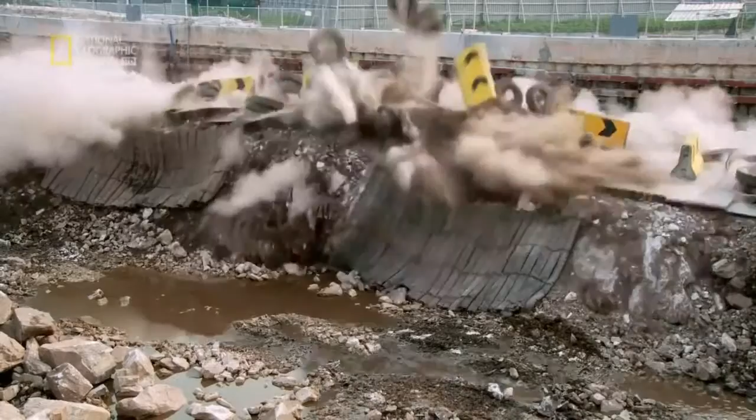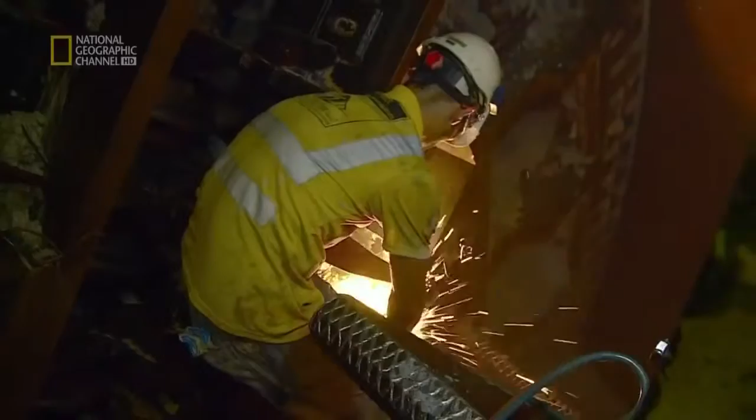Now there's an ambitious solution: a new transit system that will crisscross not only the city, but the entire region of Greater Kuala Lumpur. Huge machines will bore into Kuala Lumpur's treacherous bedrock to carve out almost 10 kilometers of tunnel. Every day of construction, the engineers confront the perils of mechanical failure, fire, and collapse. Get it wrong and billions of dollars of investment could go to waste, and the streets of Kuala Lumpur and its pent-up economy will stay trapped in gridlock.

Kuala Lumpur is one of Asia's most vibrant cities. It's looking to compete with the region's Asian tiger economies. Its magnificent skyline testifies to its soaring ambition. But at street level, it's a different story. The city is blighted by severe congestion that threatens its future growth.

Over 7 million people live and work in the Kuala Lumpur region, the Klang Valley. Every day, they head into town in 4 million cars. As an alternative, a light rail transit system was built. But over time, it has been overwhelmed, and connections are inadequate.

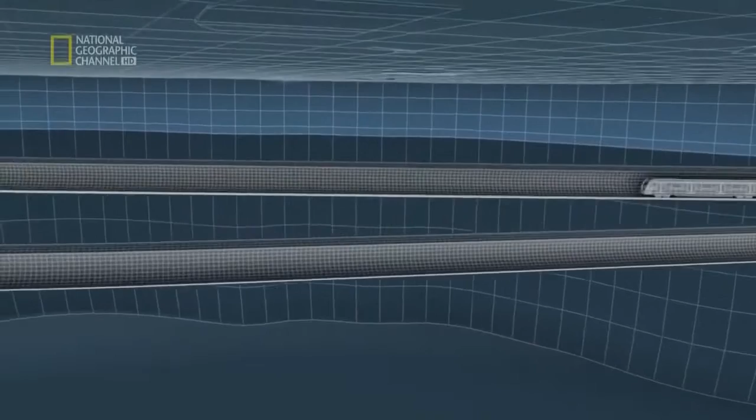Now there's a solution, a new mass rapid transit system that will reduce the pressure on traffic and unite far-flung parts of the city. For any modern metropolis to be vibrant, to be competitive, to be on par with some of the leading cities in the world, you've got to have a modern public transport system.

The Klang Valley Mass Rapid Transit System, the KVMRT, is Kuala Lumpur's bid for greatness. 3 different routes comprising more than 150 kilometers of brand new lines. It will be seamless travel around the Klang Valley, especially the areas of high concentration population.

And the first stage of the plan is the biggest test of all. This is the Sungai Buloh Kajang line. It will stretch 51 kilometers with 31 new stations. And a fifth of the new line will have to be constructed underground.

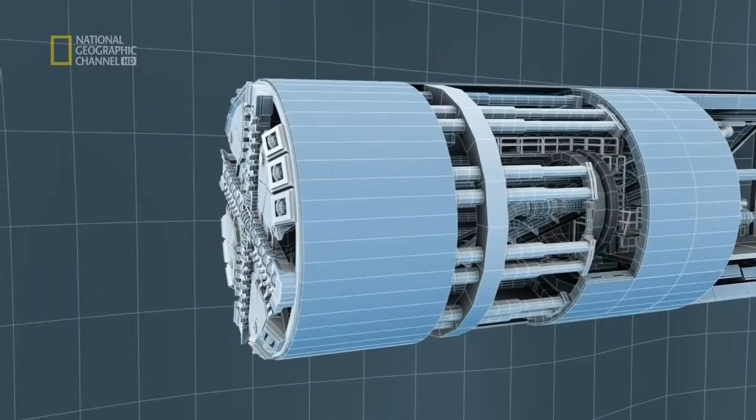To do this, 10 giant tunnel boring machines, or TBMs, will be brought to Kuala Lumpur and set to work. These mighty engines do much more than burrow through rock, astonishing though that process is. As the huge drill crunches forward, the back end constructs the tough tunnel frame with high-strength concrete.

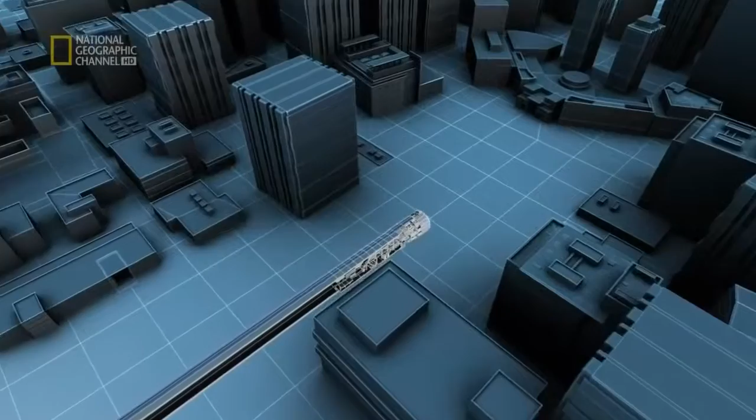In charge of this massive operation is engineering veteran Satpal Bogal. Most cities now, for railway mass transit systems, the tunnels are built using TBMs because of safety issues and because of ground conditions. The underground section of the new MRT will be a perilous undertaking.

For beneath Kuala Lumpur is a formidable engineering challenge. Below the city are 2 very different kinds of rock, and the TBMs will have to deal with both. The western area is known as Kenny Hill, and the eastern area as the Kuala Lumpur limestone. Imagine the difference between a Dutch Edam and a Swiss cheese riddled with holes.

These voids can be transmitted all the way to the other side of the cheese. Things can move in from one hole to another hole, and it may come in vertically and go out laterally. The most formidable challenge lies beneath the eastern areas of Kuala Lumpur, which rest on a huge slab of limestone.

Over millions of years, torrents of acidic rainwater have eaten away the layers of rock to sculpt a hidden landscape of pinnacles, cavities, interconnected passageways, and colossal caves.

Around me here on my left is a surface karst, or a limestone hill, you can say it. Now imagine when we are underground and all these are covered with soil, it is totally a different ball game. So when you tunnel through this kind of material, there are a lot of unforeseen circumstances which would be a nightmare for tunneling.

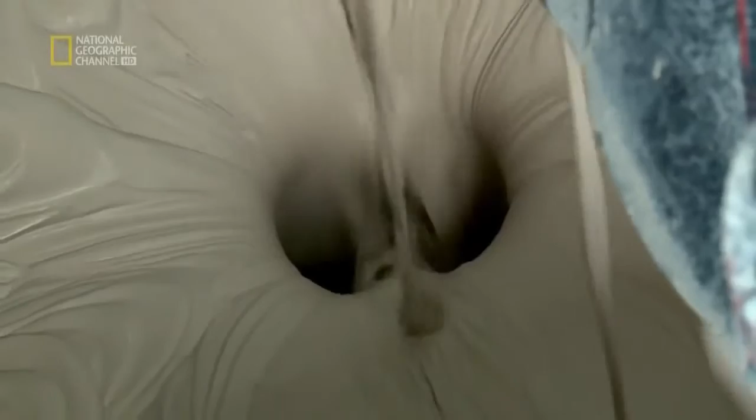This is the worst nightmare of all: the drill head hits weak cavities and the rock caves in on the cutter head. The solution is this stuff, slurry. At the head of the drill is a high-pressure chamber that injects a liquid called bentonite slurry into the cavities before they can collapse.

This ingenious system was used by the engineers who built the Smart Tunnel in Kuala Lumpur, the world's first combined storm and traffic tunnel. But builders learned some hard lessons about slurry. Ng Hau Wei was a rookie engineer on this project.

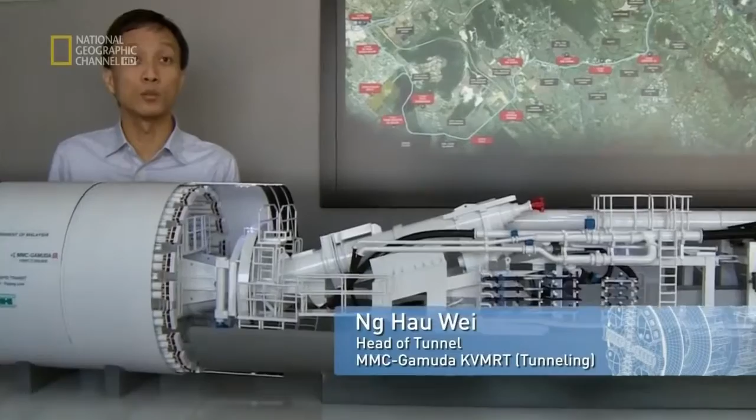We have the best machines in the world in the SMART project, but we still do have some problems. We just couldn't control the slurry and it easily escapes to the surface, creating sinkholes. What Ng and the engineering team found, to their cost, was that the slurry they injected into the limestone cavities could escape into surrounding rocks and cause havoc, bursting from the ground like a geyser or creating sinkholes at the surface that might suck in people, cars, or buildings.

Today, Ng heads the tunnel team building Kuala Lumpur's MRT system. And this time, he had to find a solution to the uncontrollable slurry problem.

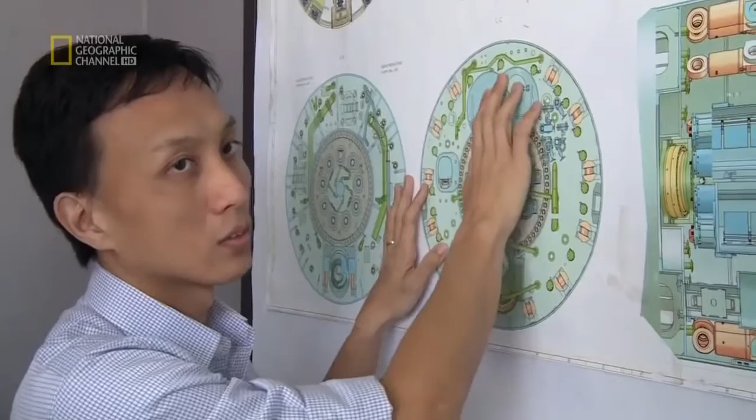Working with German company Herrenknecht, Ng and the team of engineers have come up with a revolutionary kind of machine. We throw in all the ideas, we have brainstorming sessions, we consult a lot of experts, we have to do a lot of research because no machine has been designed like this before.

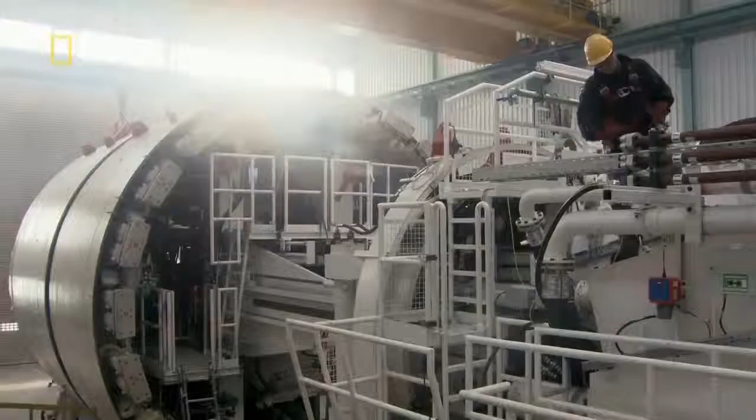From these brainstorming sessions was born this mighty machine. Called the Variable Density Machine, it's the state-of-the-art tunneler. For the first time, a TBM can control the consistency of the slurry and take on whatever Kuala Lumpur's underground throws at it. Even the construction of this revolutionary machine is on an epic scale.

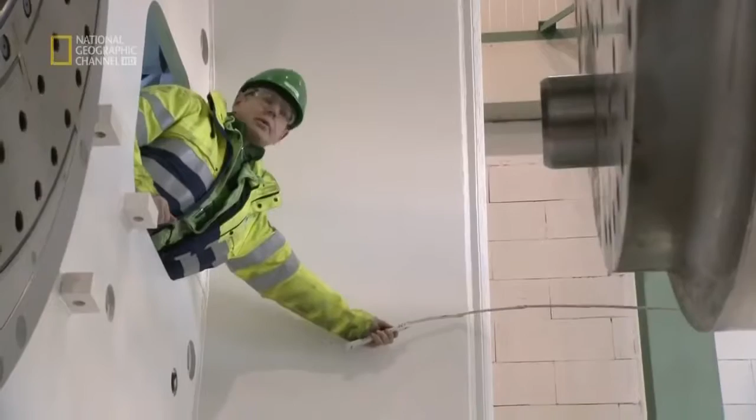Components are brought from all over Europe to be assembled inside the massive factory in Schwanau in Germany and other Herrenknecht plants in China. One machine like this is fitted together, with about 40,000 pieces one by one.

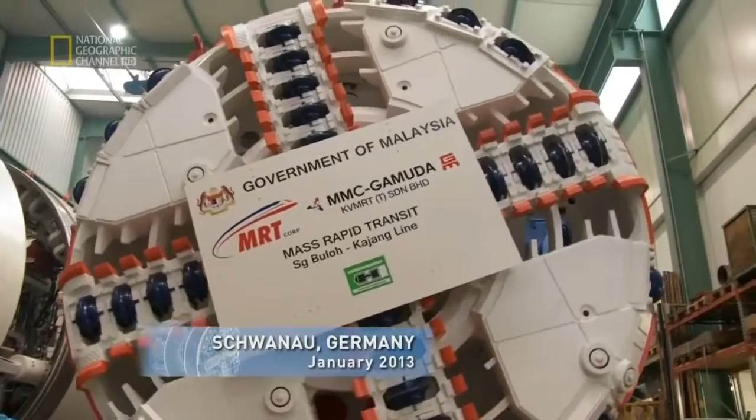The design starts screw by screw, piece by piece, and this is brought together with all our 400 engineers. They do all these works to come to this level, what you can see today. It takes 9 months to manufacture the revolutionary TBM. Today, it's ready to be put through its paces.

We have only seen it on the drawing board so far. So this is the first time that it is all put together. Everything is running, so we can check every equipment, including the cutter heads, the hydraulics, the safety features. This is the last chance for us to make final modifications before we send it to the site and put it in the ground.

As the engineers work on the TBMs in Germany, work gets underway in Kuala Lumpur. The engineering company in charge of tunneling, MMC Gamuda KVMRT, must complete the job in 24 months and with minimum disruption to the city above.

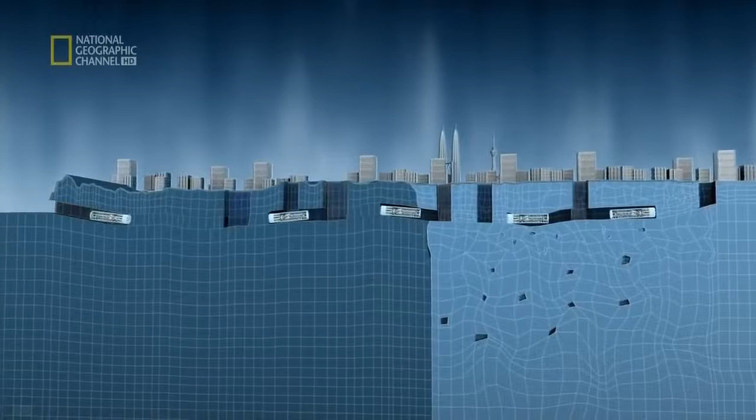The operation is conceived on a military scale and with military precision. The TBMs will be launched from 4 different staging zones along the planned route of the underground section of the MRT. At the western end of the tunnel, the elevated section of the MRT begins its descent underground from the surface. But at the 3 other zones, shafts must be excavated so that the different TBMs can be put to work beneath the city. Eventually, the different sections of the 9.5-kilometer tunnel must all link together.

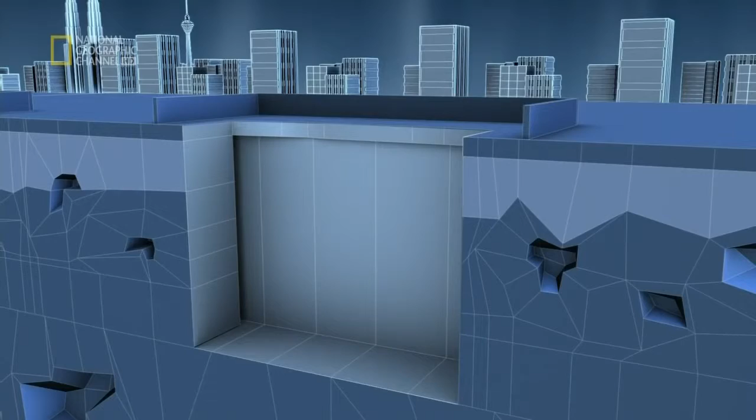Since July 2011, work on Kuala Lumpur's new MRT starts here at the Cochrane site. It must be dug out to a depth of 30 meters before 4 TBMs can be deployed. The huge staging zones will be blasted out of the ground.

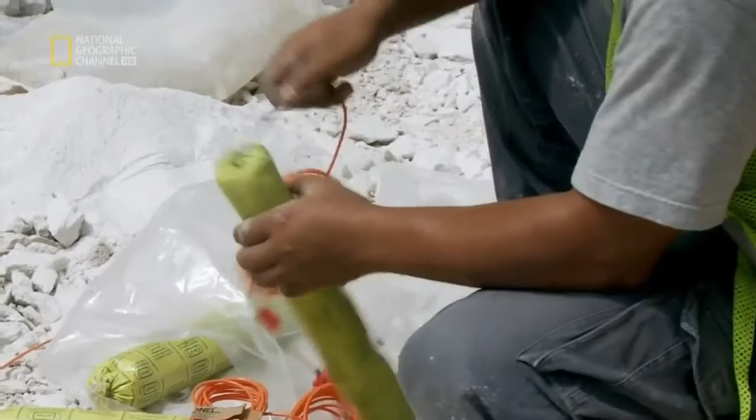We have short time to meet our requirements, so we are working with frequent blasts, more than 2 or 3 blasts a day. The blasting must be carried out with rigorous precision, especially in a city as dense as Kuala Lumpur. So when you talk of blasting itself, it's dangerous - you can see we've been surrounded by high-rise buildings.

Now at the moment you're using about 150 to 200 kg. So that can bring a 10-story building down. The solution is to sequence each blast, creating a pressure wave that, in theory, won't damage surrounding buildings.

These are the basic things we use. My hand now is explosive, which will be charged to the detonators over here, and it will be connected one at a time, and finally we have delays. These will segregate the blasting rather than at one go.

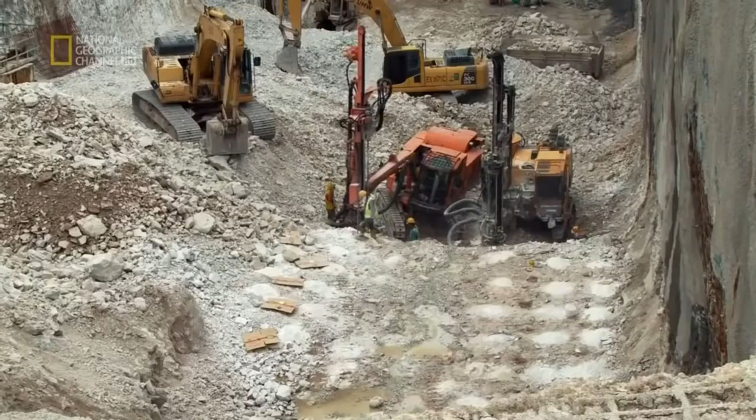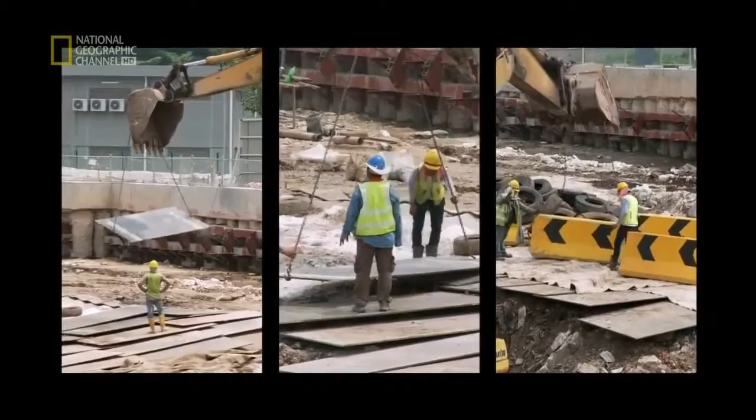Engineers dig rows of holes between 3 to 6 meters deep. Then the explosive charge is inserted inside with a detonator. These are connected to a central command point. But nothing is left to chance. Giant barriers of steel plates, truck tires, and concrete prevent debris flying from the site. The charges are set.

The engineers have got the right formula, and the surrounding buildings are safe. The blasting continues at the Cochrane site for seven explosive months, and enough rock and soil to fill 50 Olympic-sized swimming pools is blown out of the ground.

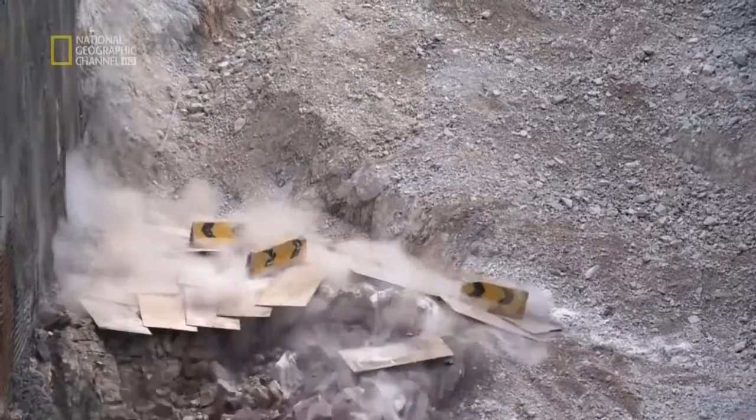Finally, the site is ready to receive the first TBM, code name 774. At the beginning of 2013, the first new model arrives in Kuala Lumpur, transported in parts to the Cochrane site on huge lorries.

But that's the simple part. Now the 160-ton monster must be lowered into the excavated shaft so it can start chewing into bedrock. To lift it down 30 meters, we have to be very careful. Anything can go wrong and then we are stuck, and it will push back the whole project completion by a lot.

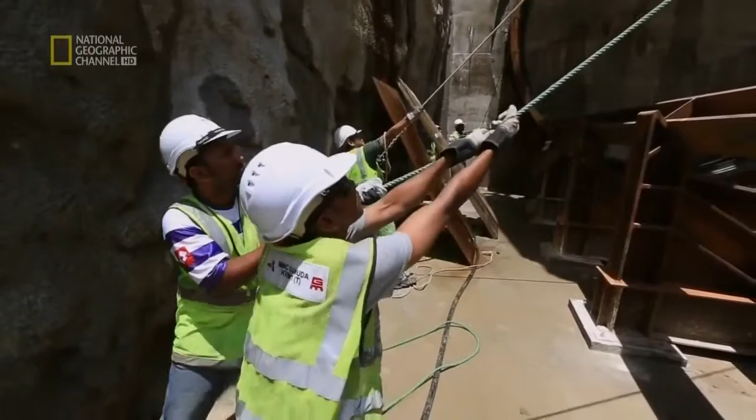At the site, everyone is holding their breath as the TBM begins its descent underground.

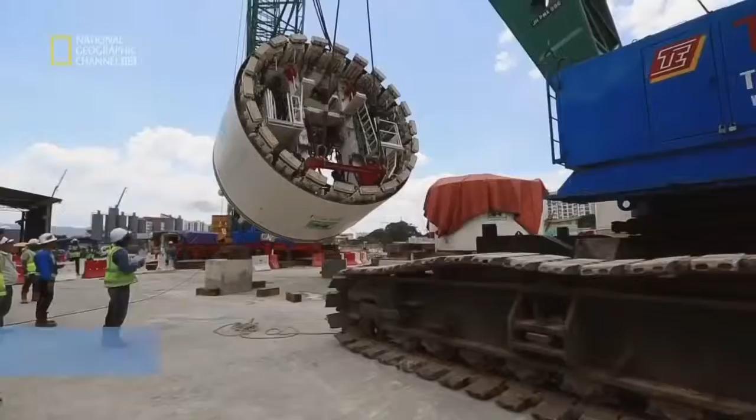Malaysia's capital, Kuala Lumpur, is being transformed into a huge building site. A new MRT system is under construction. Close to 10 kilometers will be built beneath the city, and a revolutionary new tunnel boring machine, or TBM, is brought from Germany. The first to be sent into action weighs 160 tons and has to be delicately lowered 30 meters to the tunnel entrance.

The man in charge of the tunnel operation is Ng Hao Wei. He won his spurs building Kuala Lumpur's famous Smart Tunnel. We are dealing with very delicate components. We cannot afford to damage it. If the extent of damage is huge, then the impact to the project will be tremendous.

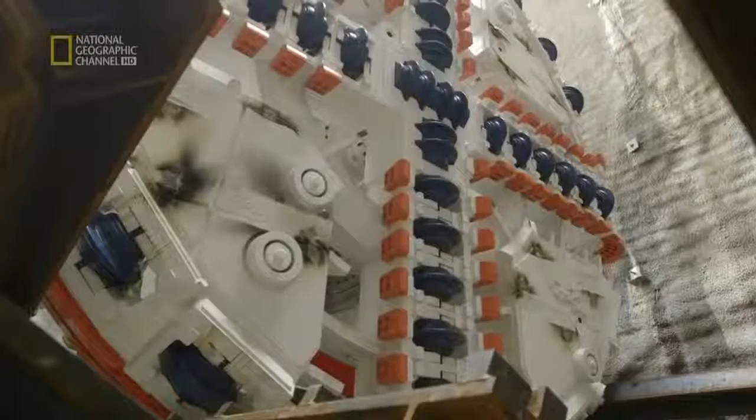This is literally the cutting edge, the business end of the huge machine. The circular cutter head weighs 70 tons with 37 tungsten carbide cutting discs, which are stiffer than steel and denser than titanium. The entire TBM is 135 meters long, almost double the length of a 747 jet airliner.

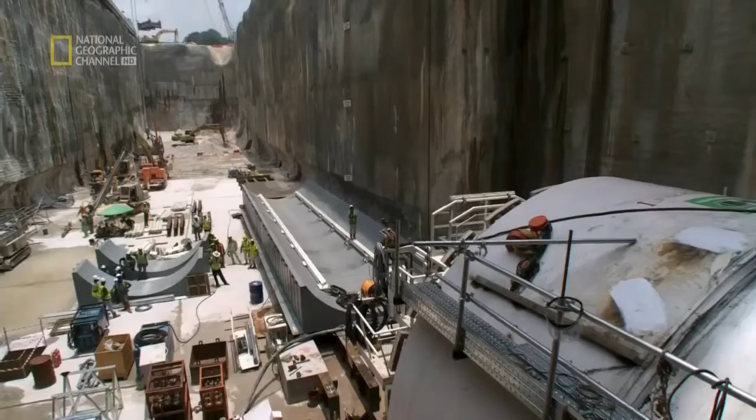Each TBM has 10 interconnected gantries to support the operation. Only three-quarters of the shaft has so far been excavated, so the monster machine has to be assembled in sections. We assemble up to the sixth gantry, which will give us the key components of hydraulics and electrics, so we can start to launch the machine, at the same time give sufficient space for the shaft excavation to go on. It takes just under three months for the TBM to be assembled.

The Prime Minister of Malaysia launches the very first variable density TBM. It's actually a technological marvel, and it goes to show that, in partnership with a German company, Malaysians can offer a lot of our technical guidance and advice. This is something that we can be really proud of.

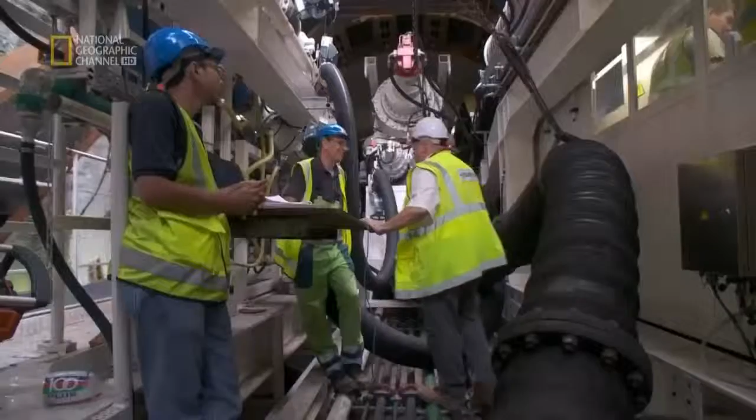One day later, Ng Hao Wei and his mentor Gustav Klados arrive to check on the machine's progress. Gus, a veteran Hungarian tunneler, has worked on some of the biggest tunneling projects in the world, including the Channel Tunnel linking Britain and France, and the Smart Tunnel here in Kuala Lumpur. This tunnel warrior is the team's project manager and is thrilled to be working back in the city on the new machine.

It's uncharted territory. We are trying out something totally new. A lot of people at the beginning said it won't work, but now it is excavating. You can hear the stones moving around in the pipe, so it's a fantastic noise. It's my favorite, much better than in the office.

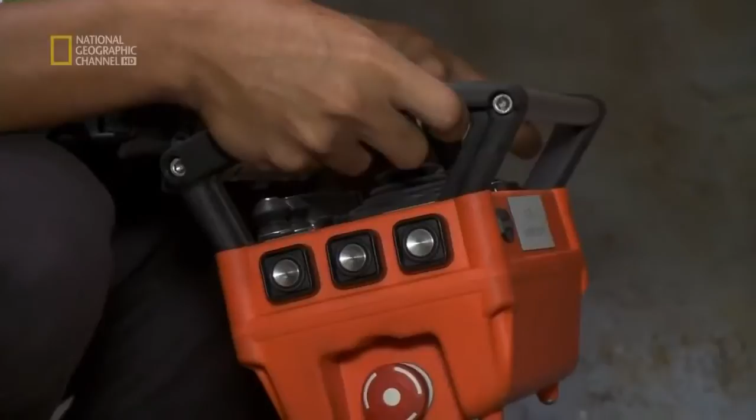It's not just the machines that will need breaking in. The giant TBMs must be served by an army of workers, day and night, week after week, month after month.

I'm new here, but I try to make my best every day. Everybody starts as new, trust me. Yeah, me too, I did start as a new guy. My first job was to go and count the number of nails and bolts and nuts in the stores. I went there and literally counted them for a week. When I finished, I went to the storekeeper and he told me we usually use a scale.

The MRT tunneling project will need thousands of workers over the two-year period of construction, and MMC Gamuda set up an academy to train the hundreds of workers needed to finish the tunnel on time.

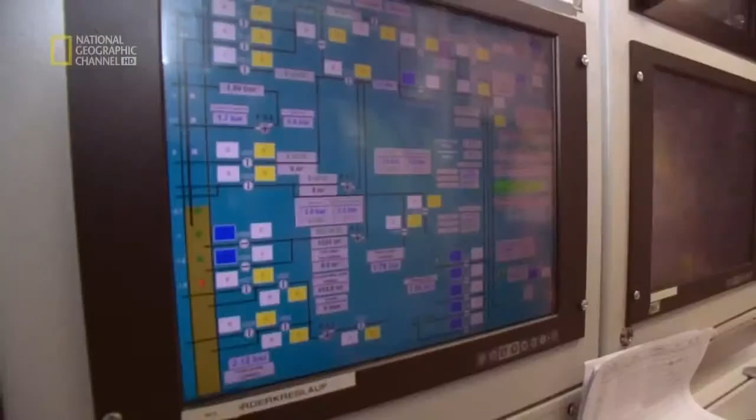Veteran or newcomer, the team faces a daily avalanche of problems, and right now the problem is pretty basic. The TBM is just not picking up speed. Eight millimeters a minute, not very fast. Yeah, but it's all right.

At this pace of tunneling, the project will take 4 years longer than expected and run millions of dollars over budget. But veteran engineer Gus Klados hopes the giant machine will soon pick up speed. In the next few months, it's just a matter of breaking in the machine, like a horse which has never been ridden before. I'm convinced we will make it work.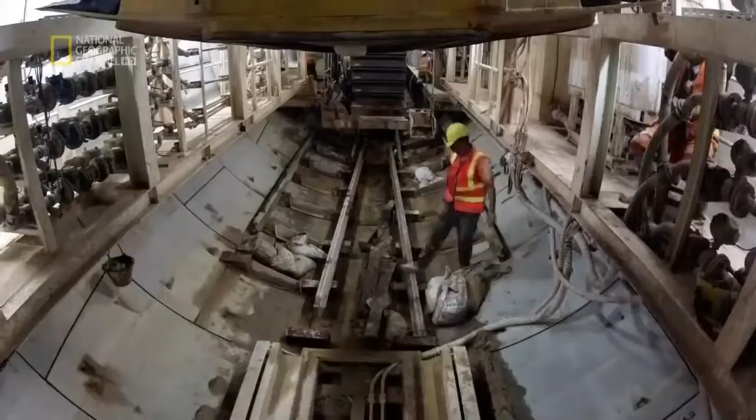The team is under pressure to complete the tunneling works on time. In the tunnels, the TBMs never stop mining. It's a 24-hour operation, and 3 weeks since mining began, the giant machine has at last picked up speed.

The TBM is like a huge underground factory, drilling, building, and spewing out waste. The heart of the entire operation is in this tiny space. Razak, what's happening? Pressure sensor number 4 has a broken wire. The control cabin is the heart, the control center of the TBM, where everything is controlled.

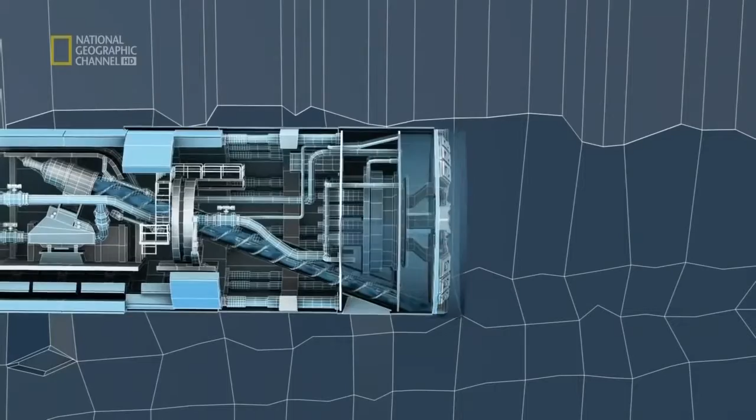If you're building a skyscraper, visibility is not normally a problem, but underground it's a different story. You can't see through rock. So to give the TBM underground eyes, the machine is equipped with arrays of sophisticated sensors. It's like working in a submarine - you have to depend on the sensors, on communications, on instruments. Other than that, you can't see anything.

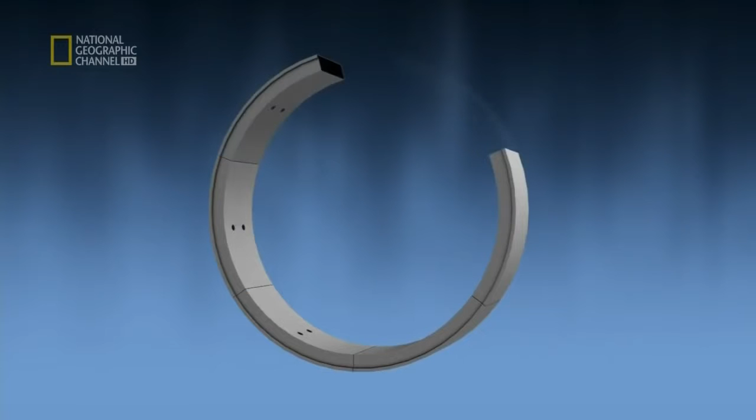Inside the control cabin, engineers can work out with absolute precision the real-time position of the TBM, calculate changes of direction, and when to start lining the tunnel wall. After mining about 1.4 meters, we build the segments piece by piece, like a jigsaw puzzle. These tunnel rings are made from 7 segments plus 1 keystone that holds everything together.

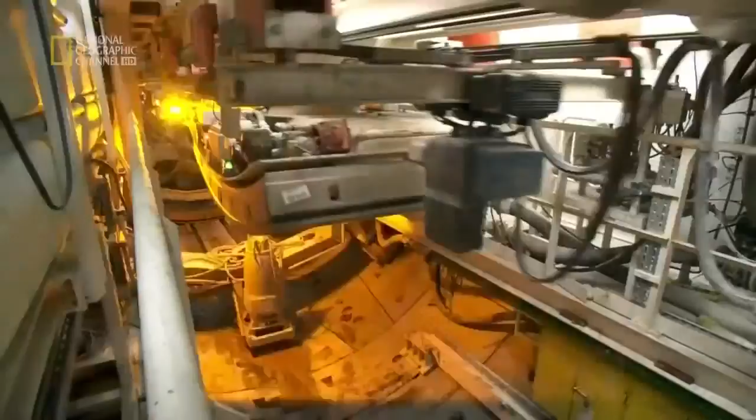The concrete wall segments can withstand extreme pressure, 30 meters underground. All day long, concrete segments arrive at the TBM. Each segment weighs 2.2 metric tons. Giant hydraulic arms swing the segments into place using the TBM's vacuum erector, which uses the power of suction to raise and position each segment.

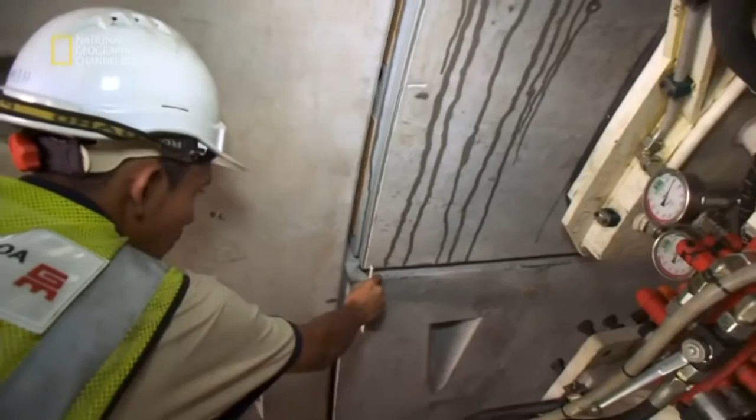Precision is essential. If any of these segments are wrongly positioned, the consequences would be catastrophic. So it's very important to drum into the ring-building team that they have to build to the required tolerance of a few millimeters. If we're out of tolerance, water will find its way to seep through and we'll have a great problem sealing it up.

Over time, as graduates of the Tunnelling Training Academy get more experience, the process builds momentum. In the first week, the teams managed to place just 3 rings a day. 3 months in, the rate is 5 times higher.

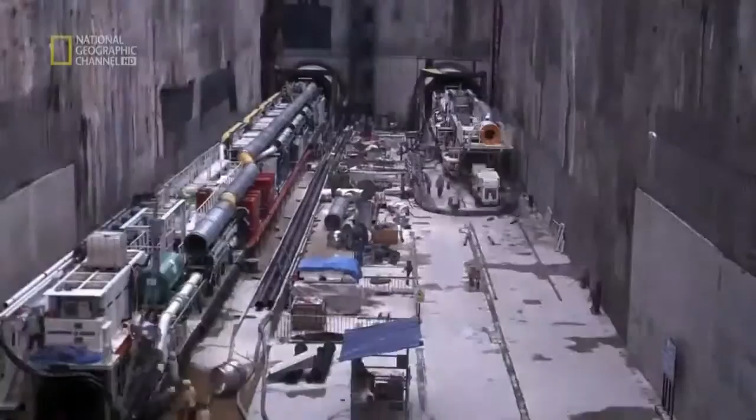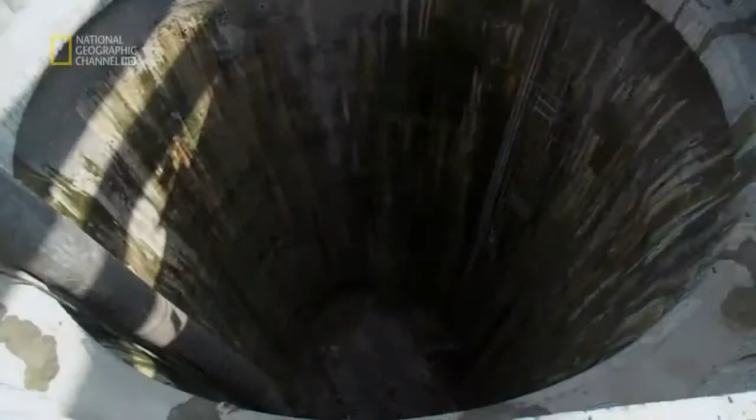The campaign to excavate Kuala Lumpur's new MRT tunnels is about to enter a more intense phase. By November 2013, 4 TBMs have been successfully launched from the Cochrane site. But at another launch site near Inai Road, the engineers have run into difficulties. Here, 2 circular shafts are being excavated to 30 and 45 meters in depth. But as the shafts are blasted out of the ground, disaster strikes.

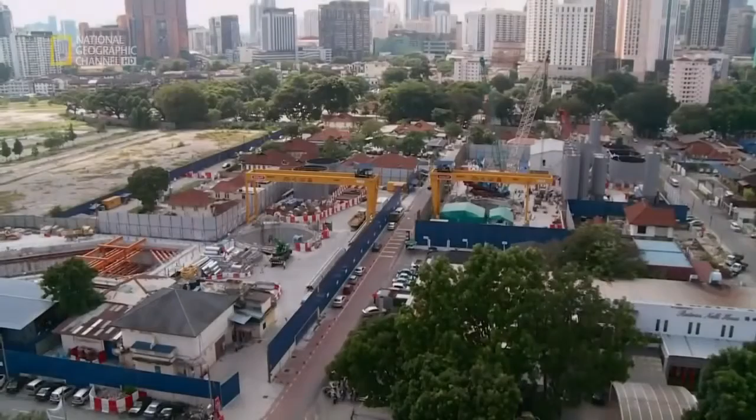The hole in the garden is frightening enough, but the condition of Mr. Jamal's home is even more alarming. Floors dip and cracks ripple up walls and across ceilings. The family home is falling apart.

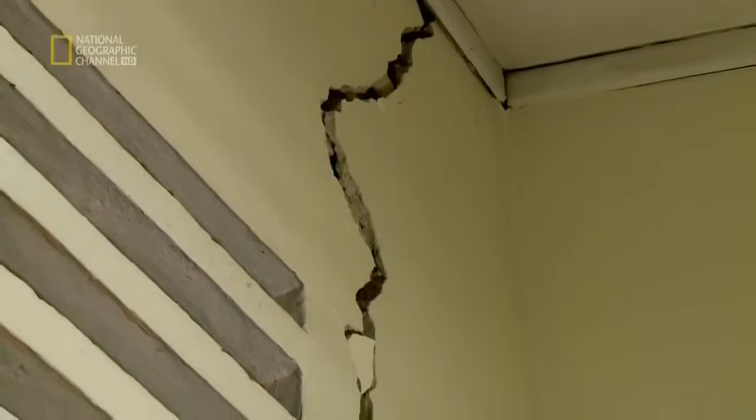Terrified, Mr. Jamal calls the company in charge of the MRT project. When inspectors see the condition of his home, they make an immediate decision to move the family out. Engineers now need to explain what has gone wrong and whether other homes are at risk.

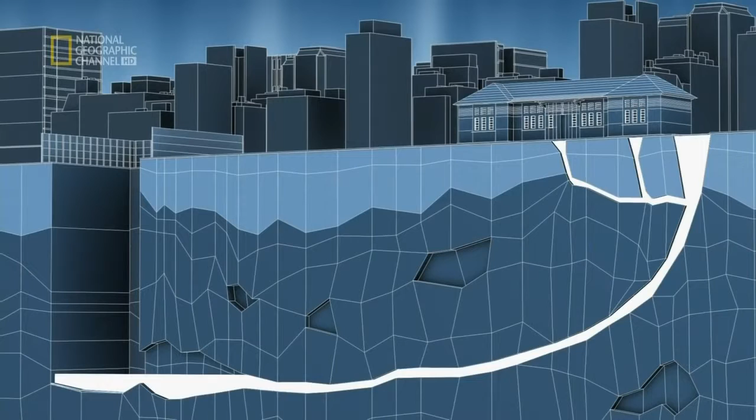In limestone, solution features can be connected laterally and vertically. What happened is we drilled a shaft, and this hit a connection. When there's a hole, it's like a pipe culvert - if you have a culvert connecting from the shaft to underneath Mr. Jamal's house, that forms an easy flow passage for water, bringing the soil from underneath the house into the shaft. That results in sinkholes.

And it's not only Mr. Jamal's house that's in danger. Water is pouring in from the walls in the deeper of the 2 Inai shafts.

It's unstoppable, and the situation is a tough call for project director Satpal Bogal. We couldn't stem it, and the decision was taken to backfill it for safety. That decision then followed on to other changes to the program.

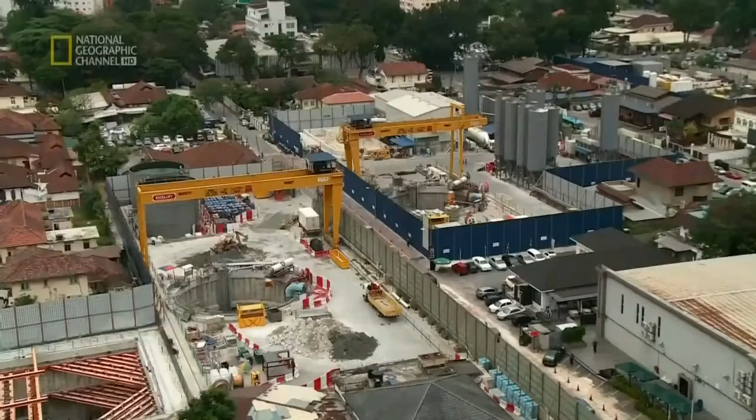Abandoning one of the two Inai shafts is a huge setback. Now only one TBM can be launched from here, which means a new strategy has to be devised. The first TBM brought to Malaysia, 774, which has been mining from the Cochrane site, must now make up the difference and tunnel more than twice the distance. It will put the complex machine under severe strain.

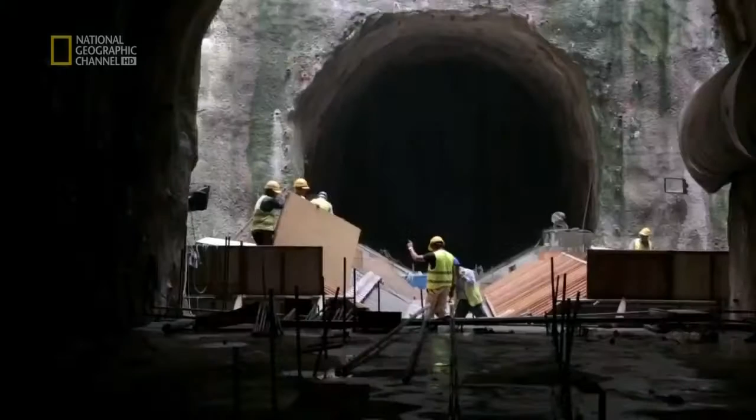It's not only flooding that makes the Inai launch site such a headache for the engineers, it's also a very tight fit compared to the other launch sites. Tunnel engineer Aslan Marzuki is in charge of getting the huge TBM to the bottom of the shaft. It's a smaller shaft, it's not a square, it's a circle. That saves space, but it means our launching is going to be staggered.

The team will blast out tunnels on both sides of the shaft. Then the front section of the TBM is inserted. Next, three out of the ten gantries will be lowered one by one, followed by the giant screw. The problem is that the 18-meter screw segment is wider than the width of the shaft.

Behind me, this is our biggest component that's going to be lowered down. It's the most difficult one because this length is actually bigger than the shaft itself.

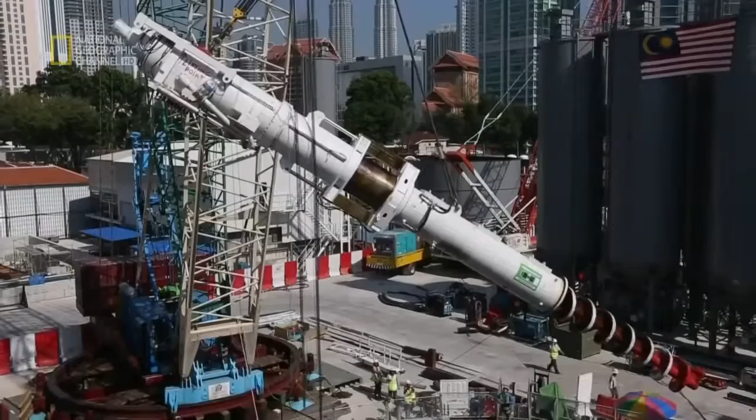The solution is simple, but risky. The screw segment of the TBM will have to be lowered into the shaft at an angle. We have to tilt the screw conveyor at a 56 degree angle. You have to use a chain block, a hand winch, to pull the machine upwards. It sounds simple, but that giant screw weighs a whopping 15 tons, and any deviation from that critical angle would be catastrophic.

At the bottom of the shaft, the engineers face another challenge. The angle of descent has to be lowered. It's another fiddly maneuver with a lot of complicated machinery at stake. When you lower it down, the final angle is 15 degrees. Down there, you still have to do the same exercise again, but it has to be a slow process. After two hours, the screw conveyor is finally in place.

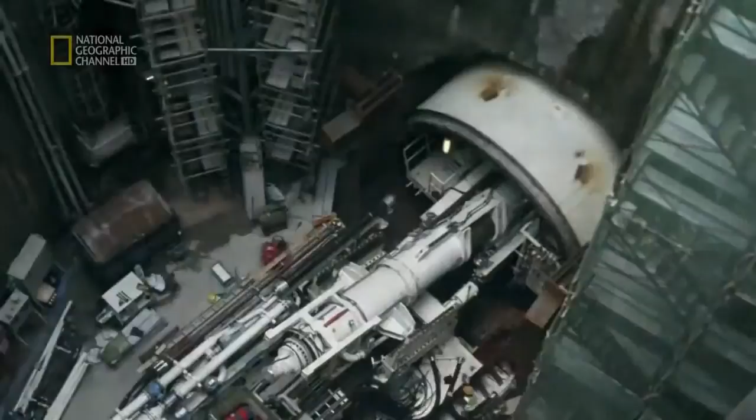It takes three months of hard slog to put the TBM together, but at last it can begin burrowing into the limestone. This underworld is packed with hidden dangers. Like Swiss cheese, the rock is riddled with cavities that could wreck the multi-million-dollar boring machine.

When you're tunneling this way and you have a cave directly underneath your cutter, and it's big enough that you cannot develop a face support, the thing just dips inside. In that situation, then we are snookered. It will take us months to recover or to bring that TBM cutter face into operations again.

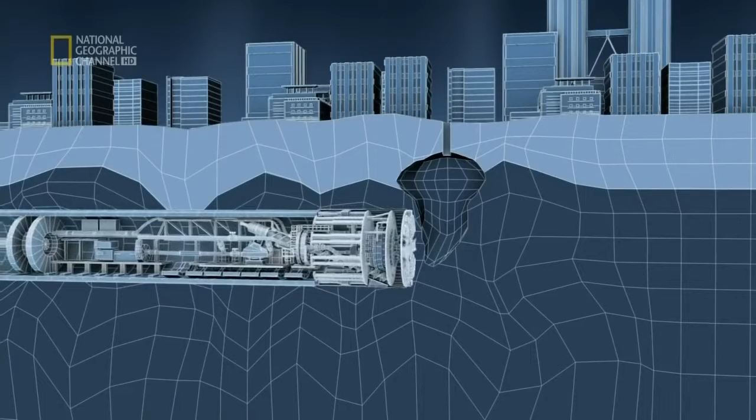So as the huge drill edges forward at 14 meters a day, an army of engineers is busy scouting the perils that lie ahead. They drill hundreds of boreholes into the layers of rock. Once a cavity is detected, concrete is poured into the hole to shore it up. It's a process called grouting.

If we do encounter such a thing, then we'll do a lot of compaction grouting to fill up this void, like you go to a dentist to fill up your cavity, to ensure that when we are tunneling through, the TBM can go through safely.

But some cavities can be less than a meter wide. These are much harder to fill, but still pose a threat. There's no way we can pick it up. We are unable to treat all these features along our tunnel alignment. So what we then need is a machine that can cater for all these little challenges.

Enter the new breed of tunnel boring machines. Behind the drill, a sealed high-pressure chamber is pumped full of liquid called bentonite slurry. Unlike previous models, the new TBMs can control the density of this thick gray liquid, changing the consistency from a thin watery liquid to a thicker honey-like substance. The thicker slurry is used to fill these hidden cavities, and its density prevents it escaping through the porous rock to the surface.

The machine is able to operate at different modes at the flip of a button or some switches. So in situations where we have major loss of slurry, we can switch to a thicker density, a kind of paste that chokes this up, and then we can mine through very easily. The revolutionary new tunneling system soon proves to be a success.

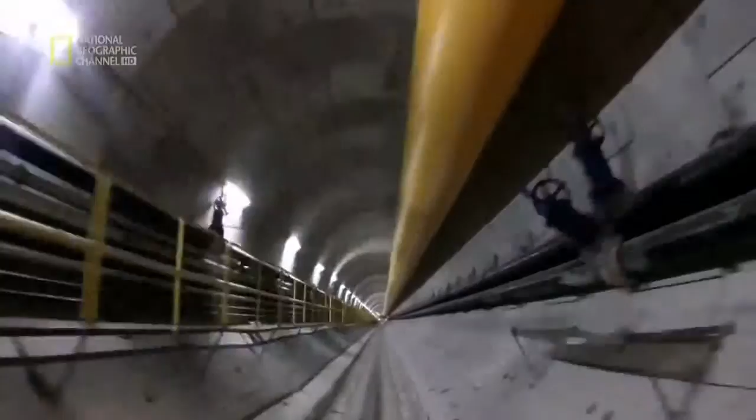But there is a problem that all tunnel engineers fear at the back of their minds: fire, every tunneler's nightmare. For engineers excavating Kuala Lumpur's new MRT system, the most terrifying scenario is a fire in the tunnel. A blaze can suck oxygen from the air in seconds. Workers can suffocate with terrifying speed, and the tunnel itself works like an oven, insulating the environment and ramping up temperatures to deadly levels.

Tunnel workers must be ready to react at any moment, and training exercises are made as real as possible. Christopher Fenton, head of safety, health, and environment for the underground, is training the company's emergency rescue team. Tunnels are very dangerous during construction. Fire is the last thing we want, and we need to be able to respond to it very quickly if it did happen.

He has brought in two fire experts from the Los Angeles Fire Department to help with the training. We can go in here and create real live fire scenarios, and we can actually see real life smoke conditions, whether it's good smoke where we can go in and find the seat of the fire and put it out, or it's so bad that we have to exit. The men and women gear up.

Anytime you see your neighbor confused or disoriented, you speak up. Tell me or the other instructor, and we will fix it. Okay? Everybody good? Thumbs up. The calm smoke like this is lazy, sleepy. Okay, go in.

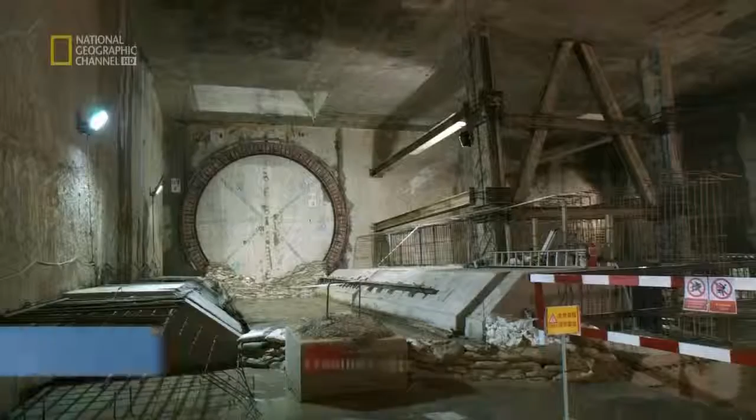Christmas Eve 2013, and the MRT engineers have cause to celebrate. One section of the tunnel, where the MRT line dives underground at Semantan to the Museum Negara station, has been completed. It's the project's first breakthrough, and at any moment the TBM drill head will emerge from this tunnel.

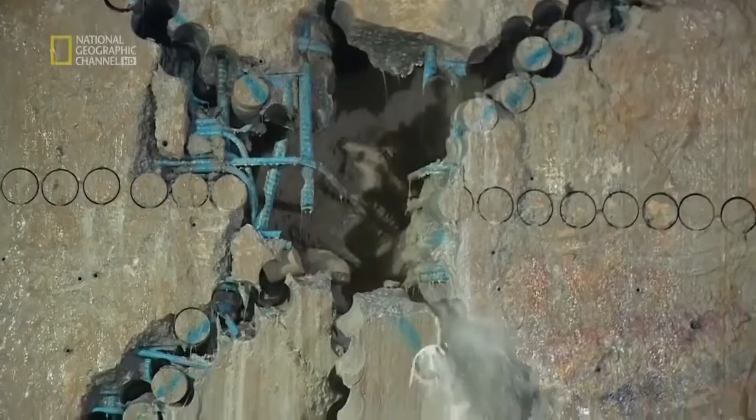It's an anxious wait for tunnel manager Chin Raymond. I told him if it doesn't come in the middle, it has to jump off a cliff somewhere. After drilling for six months, the TBM punches through right on target.

Congratulations. Thank you, boss. Well done, man. Okay. Good. Yes, great. Finally, I pushed my machine through. I've been working for more than 24 hours. I can have a good rest to enjoy my Christmas.

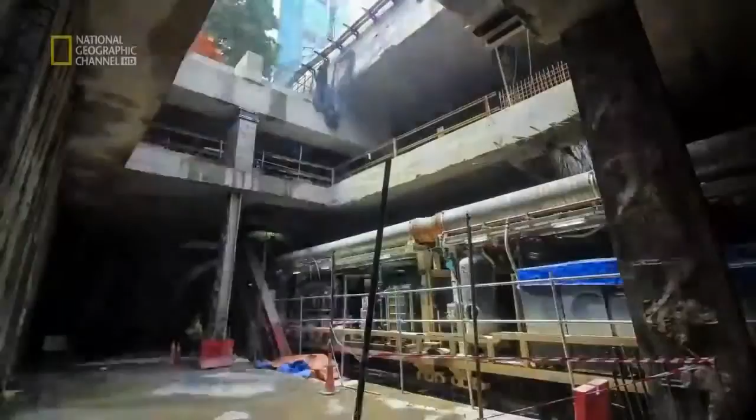But the machines don't get a holiday. As soon as the TBM completes its breakthrough, it is hauled into position to begin work on the tunnel that will link Museum Negara to the next station. The TBM is now burrowing beneath the historical heart of Kuala Lumpur.

The Museum Negara is a repository of the nation's history and culture. Its facade is lined with precious mosaics. Further along the path of the excavation is the old railway station, an icon of the past that stood the test of time. But can it withstand the mighty TBM as they thread their way nearby?

We were stuck with having to cross under some sensitive structures, and the ground settlement would affect the existing structures. If there's too much ground settlement, the buildings could collapse.

For the old building, we had to pay much more extra care because we don't know how good the structure is, or how good this building's foundation is. So we had to pay extra precaution on that.

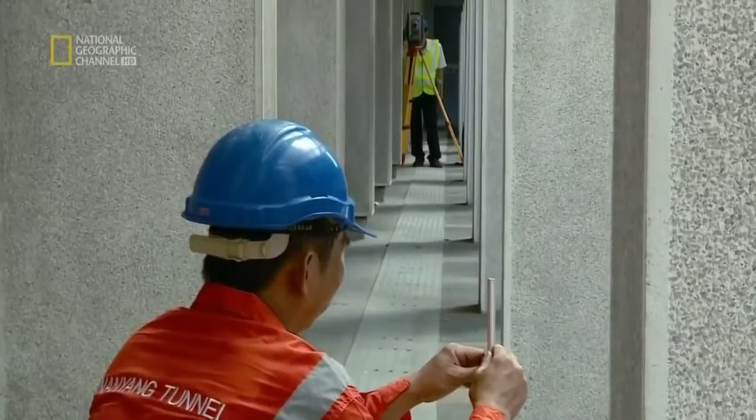A team of surveyors now equip these venerable buildings with highly sensitive sensors that monitor every vibration. As the TBM approaches, Tae Chi Yong and his team of surveyors nervously carry out hourly tests to monitor the old buildings. The TBM is below this building directly. We get to monitor the effects and the impact of our TBM drive on the structures above, on the surface above. It's a nail-biting 5 months of constant monitoring as the TBMs negotiate this historic region. And at last, the TBMs inch past. The iconic buildings are safe.

The most powerful man in the world is coming to Kuala Lumpur. All eyes are on Malaysia. But less than 400 meters from Barack Obama's hotel, TBM 774 has come to a standstill.

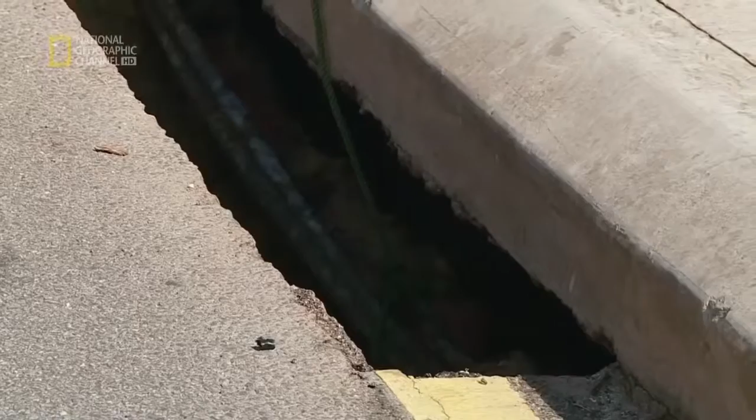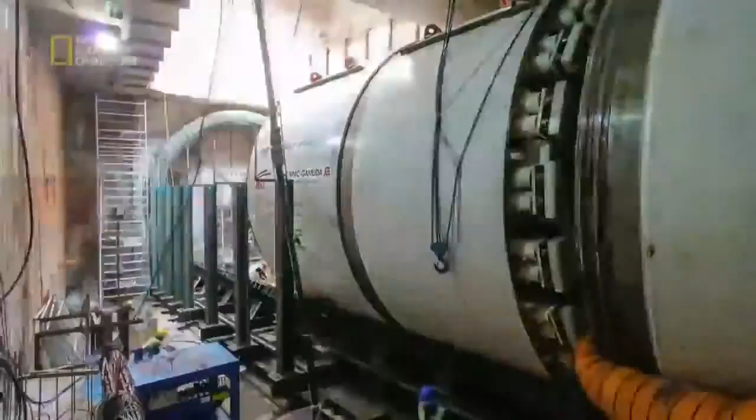While the people of Kuala Lumpur get used to living and working in a massive work site, where giant boring machines gnaw away at the city's bedrock to build a new MRT, the President of the United States will be descending on Malaysia in 3 days' time.

But all is not well with TBM 774. Located less than 400 meters from Obama's planned accommodation, the TBM gets a bad case of indigestion and is unable to process the waste from the cutter head. It has come to a halt.

Directly above the TBM, a team is tasked with monitoring road surfaces to look for any signs of trouble. Called the Bull Gang, it is led by Michael Poon. We have a team of people patrolling 24 hours. We have to check on the surface. This morning I walked by, I saw some settlement. It's just a small depression. I can see the hole.

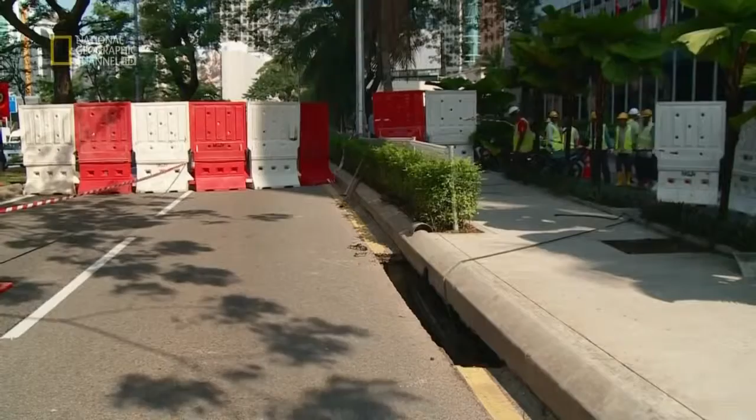It's quite deep. At the surface, the cracks don't seem to pose much of a threat, but like icebergs, most of the danger is hidden. Down there is a void big enough to fit an electric car. We have an unscheduled stop. They have to lower all the slurry. That means the face support is affected, and that causes a depression or a sinkhole in front of the cutter face.

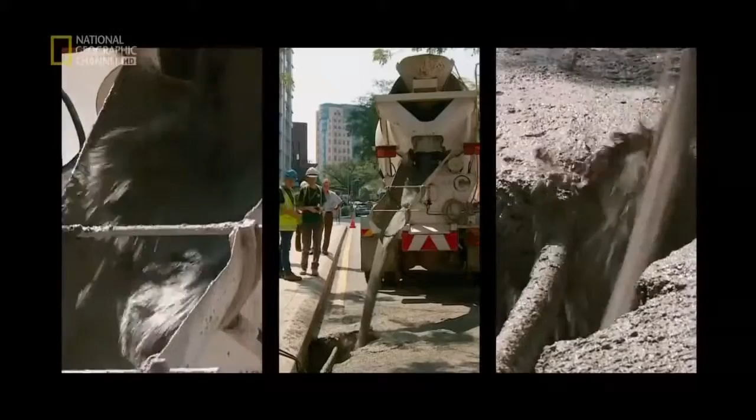An emergency response team reacts immediately. The road is closed to traffic. Then we decide to order mortar to fill up the hole. The hole is quickly filled with 5 cement trucks of concrete, and frantic repair works continue inside TBM 774.

Across town, there is reason to celebrate. The 5th breakthrough of the project will take place today. It's a landmark moment. It means that 50% of the tunnel has been completed.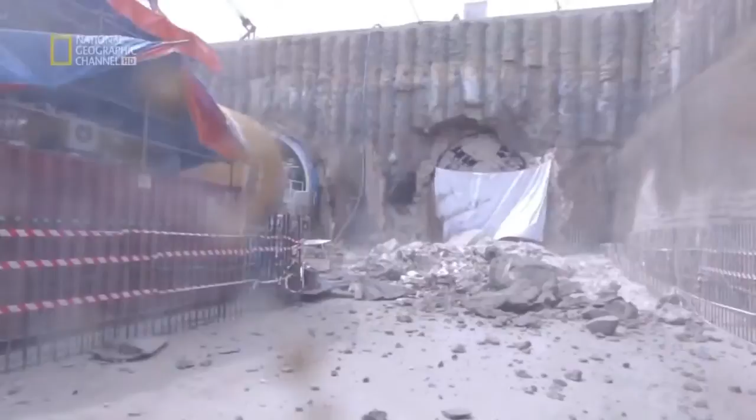Well, every breakthrough is like a landing on a plane, right? Once you're there, you feel great because you brought home the TBM. The breakthrough, I thought it was very exciting. Now we finished everything. It's very, very good. I'm very content with the progress as well. The quality of the tunnel linings that we have in the precast concrete inside is one of the best. We work as a team, night and day, blood and sweat, hard time, good time. This is the prize for all the crew. This is like a present.

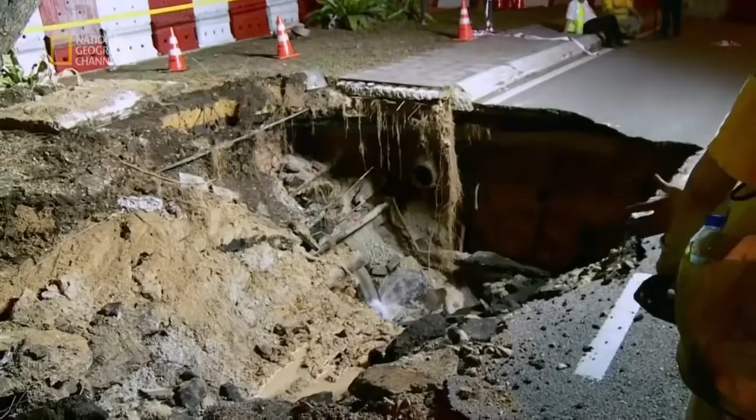But the celebrations are short-lived. As TBM 774 finally starts mining again, President Obama arrives in Kuala Lumpur. But to the horror of the team, another collapse occurs just meters away from the earlier sinkhole as the president is at the official state dinner. This new sinkhole is an even bigger problem than the previous one. Ground movement has broken water pipes, and the hole is filled with live power cables.

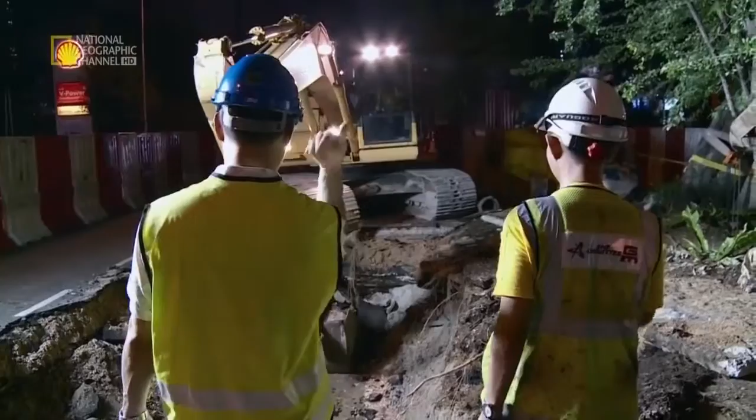President Obama is living nearby. We definitely would not want to cut off water and power to where Mr. Obama is living, obviously. So we're trying to get this done in the quickest time possible. Racing against time, the Bull Gang takes 5 hours to repair water pipes and fill the hole. As they work into the night, President Obama and his entourage are blissfully unaware of the battle being fought less than 400 meters from their hotel.

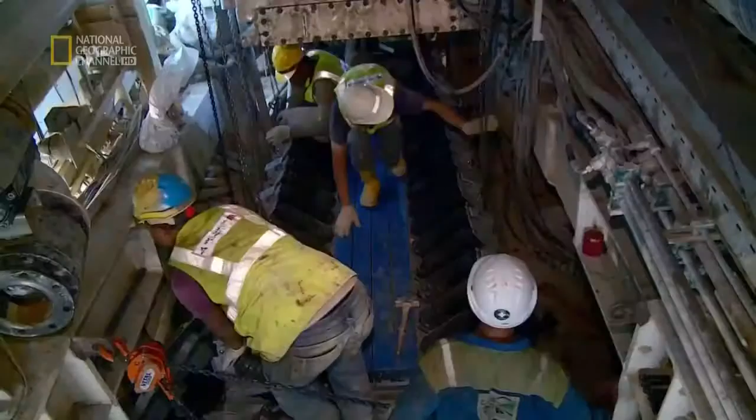TBM 774 is now approaching the zone where the underground geology changes from the karstic limestone to the Kenny Hill Formation, from Swiss cheese to Edam. We are going through a very distinct change in ground conditions. In normal cases, you will need to use 2 different types of machines, and you will need to have another launch shaft to do this. It will take months. But the new variable density TBMs can be retooled underground.

It's a matter of changing the way waste is extracted. Instead of extracting through pipes, it needs to be removed with a system of conveyor belts right to the end of the gantries onto these so-called muck cars.

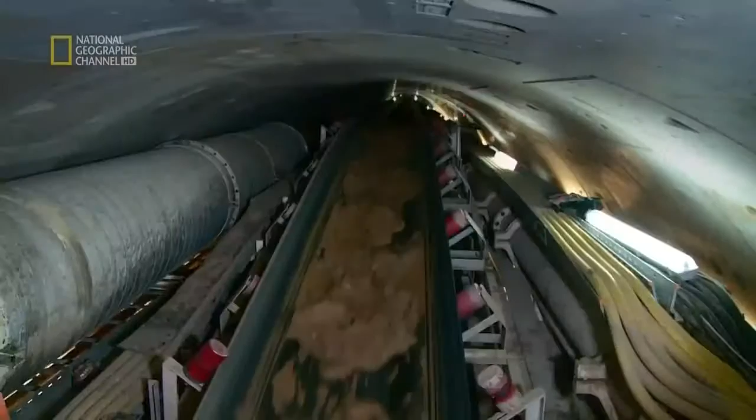The conversion takes one week to complete, but it's a much smoother process than the older system.

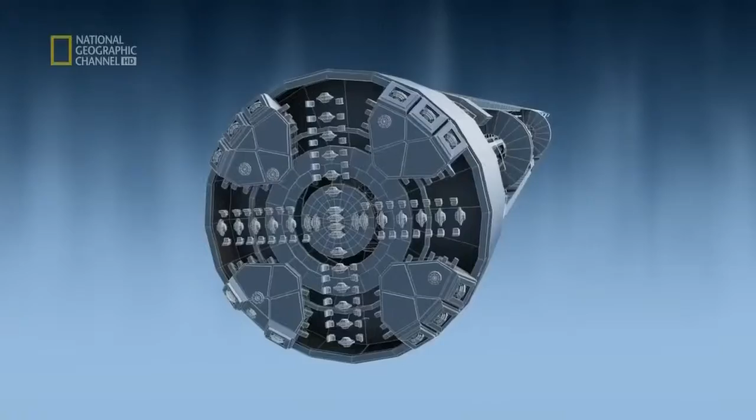But a much bigger hurdle awaits TBM 774: an underground tangle of steel wires that could bring the TBM to a standstill. 30 meters beneath Kuala Lumpur's nightlife hotspot, Bukit Bintang, engineers excavating the underground section of the city's new MRT encounter an unexpected obstacle. Contractors of a shopping mall adjoining the street have left steel wires known as ground anchors in place, and these are bang in the path of the TBM.

Put into the ground as temporary supports for the basements, they could hold up work for months. It's very difficult to find them from the surface, and you cannot remove them from the basement anymore because the permanent walls are built. They are all covered.

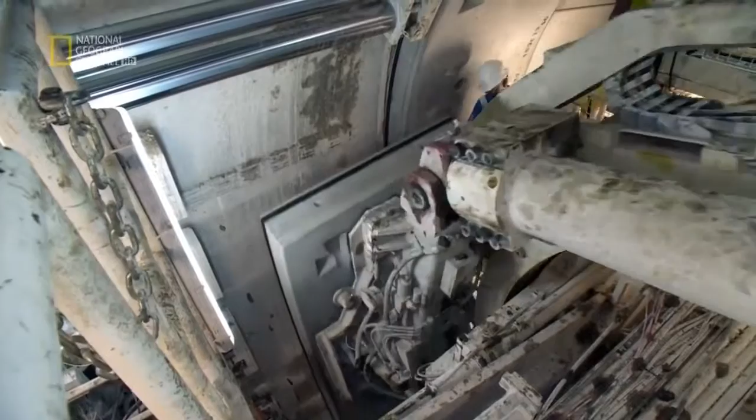Since the steel wires cannot be extracted, a decision is made to push on through with the TBM. But there is a continuous risk that the drill head may become entangled and damaged in the wires.

It is the task of engineer Hugh Wei Hon to monitor the tunnel ahead. So in the morning, actually, we found some ground anchors dropped underneath the conveyor belt, and we decided to stop the TBM, look for the ground anchors, cut it and remove it.

A team now has to enter the space around the cutter head at the front of the TBM. There's little space to maneuver, and temperatures are close to 40 degrees Celsius. To overcome this tangle, first the team washes away earth from the cutter, exposing the snarl of steel wires caught in the cutter head. These must be cut away with an oxyacetylene torch. It's a laborious process.

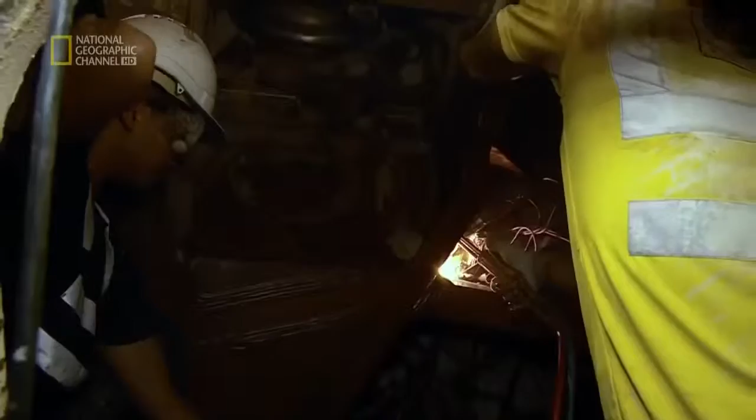Every time they hit the ground anchors, the TBM halts as the wires are trimmed away. It takes two weeks to mine through this web, but it could have been worse.

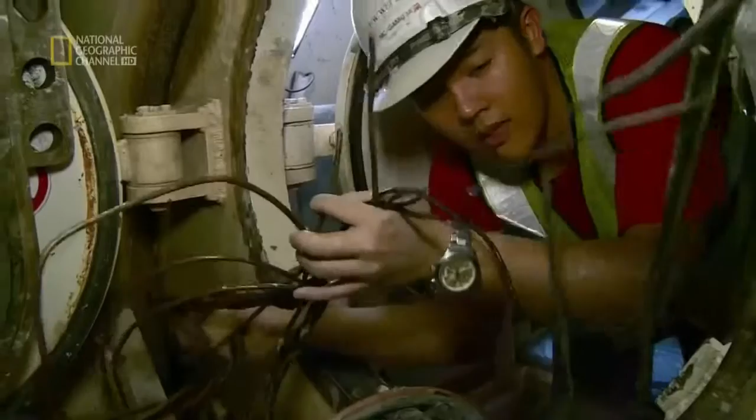If we had hit all the ground anchors that we expected, it would have delayed the project by about 3 to 4 months. We were able to go down and cut these ropes so that they weren't stopping the cutter head from turning, and we carried on.

It's the final breakthrough. After 23 months of excavation, from tomorrow the TBM will fall silent. The honor goes to TBM 774, the first TBM to be launched into the limestone labyrinth under Kuala Lumpur. It has burrowed its way through almost 5 torturous kilometers of rock and soil. Now it must make the final breakthrough.

It's a thrilling day for the engineers inside the giant machine. We are about to break through. We have about 400 mm left on the cut. Hopefully we'll get a successful breakthrough.

What's happening now is we're cutting the D-wall, so that's basically the barrier between us and open air. This is a very exciting moment for us. Any moment now, maybe within the next half an hour, we'll be out in the station.

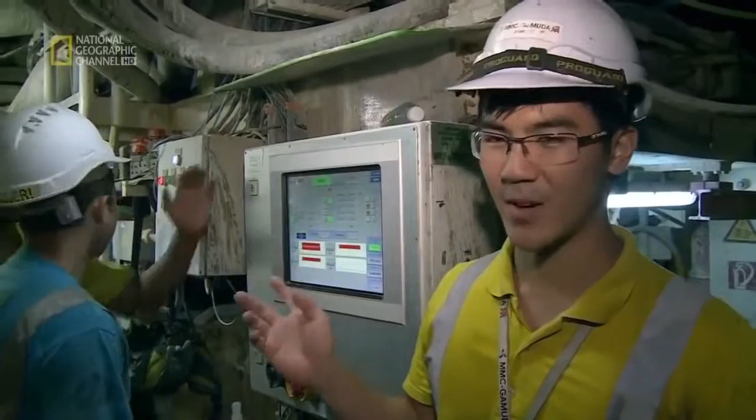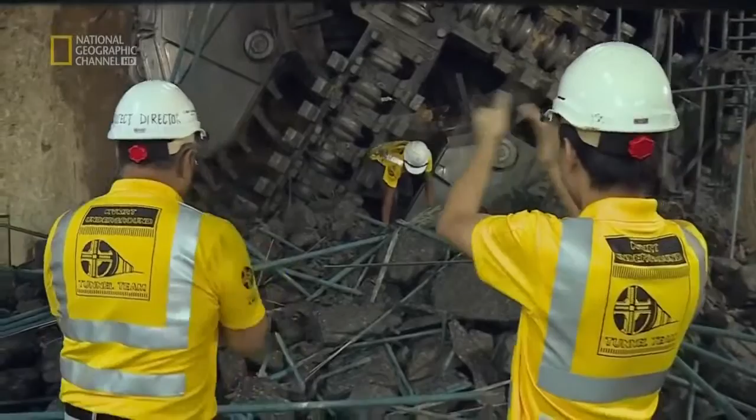This is the completion of our actual tunnel mining, which is probably the highest risk on the project. Smart had over 50 sinkholes in a similar length of drive, and on this project we've had only about 3. We used a variable density machine effectively, and that has proven to be a success.

Just weeks ago, MMC Gamuda won the Technical Innovation of the Year award for the variable density TBM in the United Kingdom. It's the biggest development in TBM technology in the last 25-30 years. So we have witnessed something new in this business. These are the most versatile machines existent at the moment. This is the future.

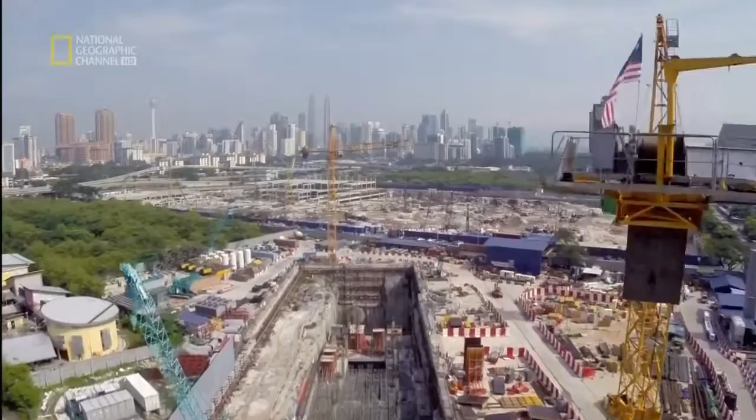The last breakthrough is a landmark moment. Now the race is on to complete the stations and get the MRT running. Only then can Kuala Lumpur's clogged up traffic arteries become truly open for business.

You're basically going to live in a modern metropolis of the 21st century. This is the new world that the people of Greater Kuala Lumpur can look forward to: a city seamlessly integrated by overground and underground MRT lines, linking together the city's heart and its far-flung suburbs, where today's gridlock is a distant memory.